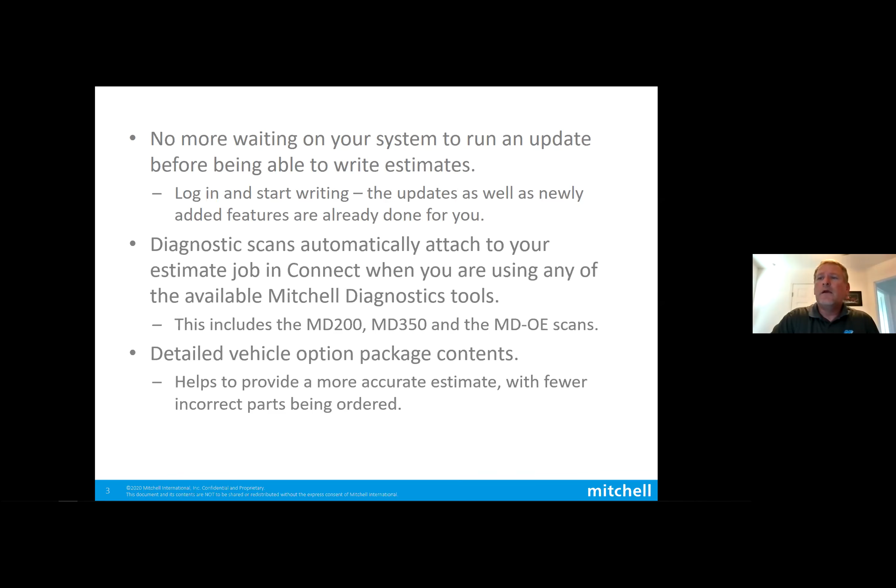There's detailed vehicle option package contents. This helps to provide a more accurate estimate with fewer incorrect parts being ordered.

We also have NADA option selection for a more accurate ACV when you're writing your estimate. This provides a better chance to perform your repairs without prematurely exceeding thresholds.

There's also no having to click on a save button, as every added item automatically recalculates and saves your work. So if you get interrupted, as long as you've added the item, it's there. You can walk away and go do something else, come back, and your work is already saved.

We also have projected estimate scenarios. You can add on certain items, such as suspension components, to see possible complete repair costs. Again, this may help to prevent working on a total loss.

We also have direct links to our procedure pages for that section, so you don't have to search through an index to find out what is included or not included with our labor times.

With the available OEM integrated repair procedures, detailed removal or replacement information is as easy as clicking the line item icon in your estimate, shown here.

We also have guided estimating. Common disassembly components are either included automatically or suggested for selection for a proper and safe repair. And Mitchell uses an outside-in method of estimation, so there is less chance of missing out on repair times if you forget to select every line, as in other systems.

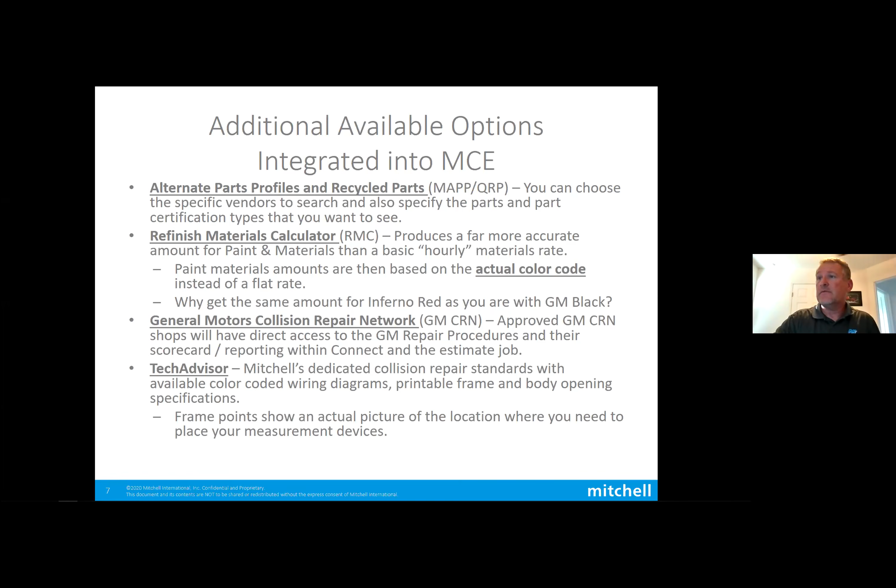For our live demos using Mitchell Cloud Estimating, demo 1 will go over the main features and writing with MCE. My second demo will show you how the Mitchell diagnostics integrate with MCE. And demo 3 will demonstrate using the special Toyota repair templates. Stay tuned at the end for our special offer notice after the demo.

When you're logged into Mitchell Connect, that is where Mitchell Cloud Estimating is. Our menu bar defaults to your open jobs when you're first signed in, and your menu bar here on the left shows some of those items. The TechAdvisor, the option I was just talking about, is located right here.

You can pull up your information and then gather what you're needing for your technician. This is also available to your technician out at his or her workstation. I'm going to paste in a VIN, and here it shows the options available in TechAdvisor for this vehicle.

So for this 2016 Silverado, I'm going to show the vehicle dimensions. It gives which model you have - looking at a crew cab short bed.

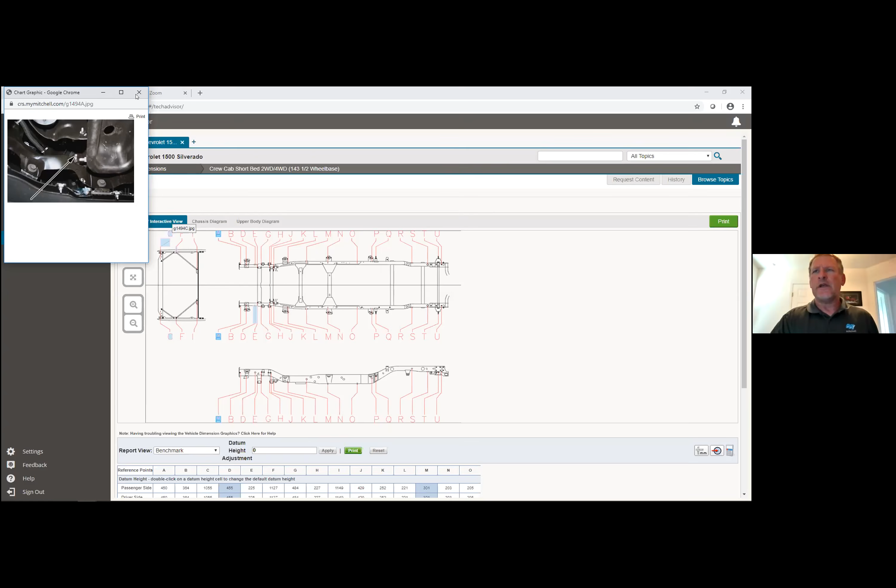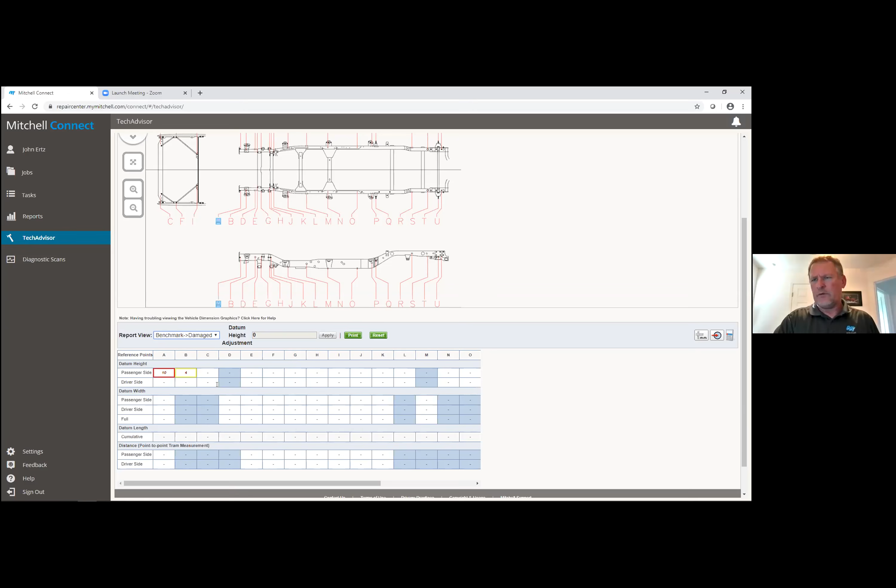Chassis diagrams - again, this is another component of the vehicle dimensions. You can zoom in to get the section that you need, and your technician can use that. They can print these out.

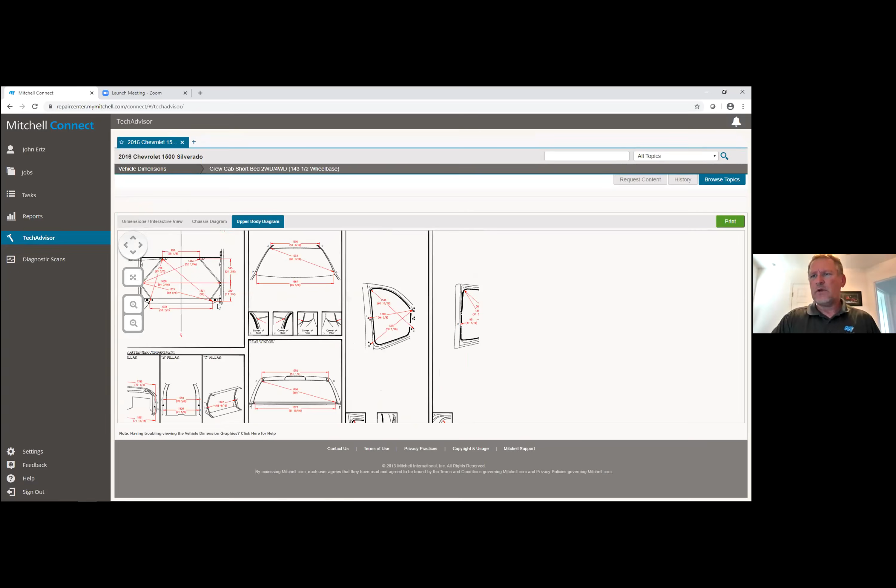Upper body diagrams are going to be your door, window, and other opening specifications. Once again, you can zoom in and print out the section that you need.

Going back to our main topics, you can also access restraint system information. And then we were talking about repair standards - these are similar to the integrated repair procedures. The difference is the technician would have easier access to the repair standards within TechAdvisor. Otherwise, you'd have to give the technician access to the estimating system for the integrated repair procedures. So these are also a little more comprehensive regarding things like interior and exterior trim.

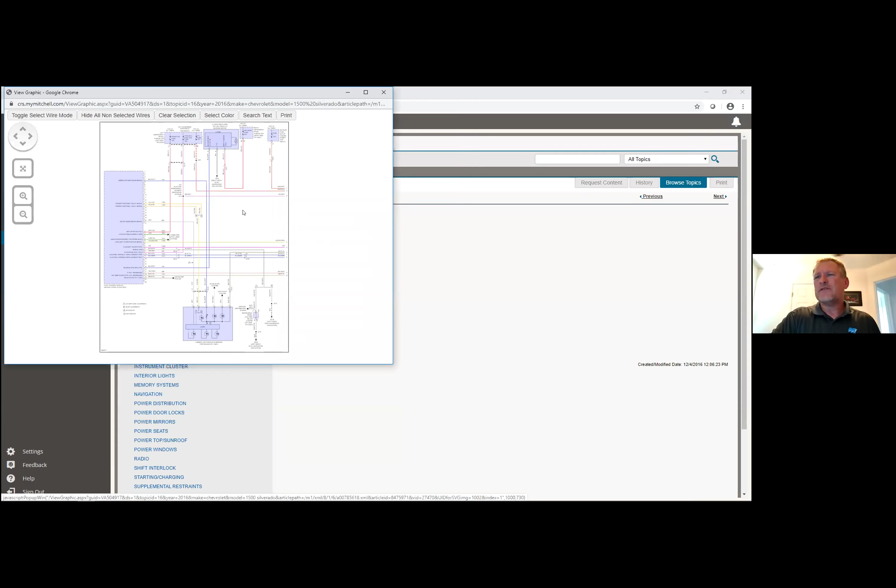Also, wiring diagrams. Selecting our wiring diagrams, common items - you can select that, and as you see, they are color-coded. Let me get this expanded here. So as you're tracing circuits, you can highlight and point out the circuits that you need, and then print this out for the technician as well.

Getting back to our jobs, other assistance with Mitchell Connect and Cloud Estimating is located down here in the Help section. This is our in-product guidance. So if you're brand new to Mitchell Cloud Estimating, you can use this to learn how to create and add users, people for logging in and how they can be managed.

You can learn how to configure your cloud estimating, creating templates and profiles, setting up your alternate parts profiles. Additionally, within the in-product guidance, you have more help available here. These can lead you to a series of tutorials, demos and training videos, so you can watch over and over as necessary when you add new people to your shop as you expand. How to create new jobs, how to use the OE templates, and so on.

And that's all located under the Help area. But now we're going to get on to how to write our demo vehicle. Simply click the plus job in the upper right-hand corner. It starts guiding you through the information that you require to create a job for the customer.

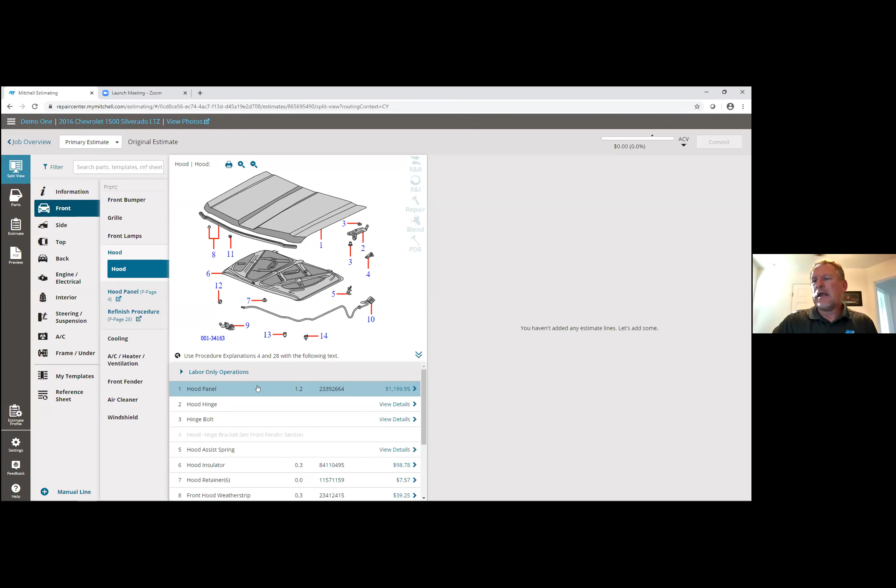So let's start out, we're going to select some parts here. I'm going to go to the front. I'm going to replace a hood. You may either select the number or the line. Once you select it, it activates your quick links. You can remove and replace, remove and install, repair, blend, or PDR.

So in this case, I'm going to remove and replace. For this particular hood, it always defaults to a new part and shows you a repair break even, so you could put up to 25 units of labor when comparing with a new part. If you have subscribed to the alternate parts program and/or the QRP, you will have a compare button.

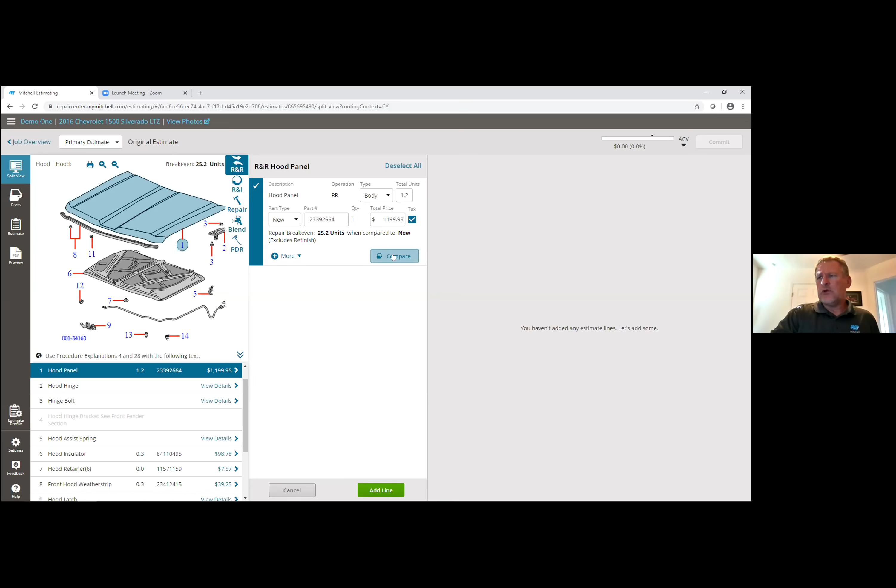Clicking the compare will bring you up the list of the vendors that you've chosen and the certifications that you've chosen to search for. In the case of recycled parts, if the vendor has put any part notes in, you'll see any damage descriptions right down here, along with their contact information. For now, I'm just going to select new parts.

Click done, and I add the line. I'm going to add a fender. So in this case, you can also double click the line to add a part. Choosing here, since I did not filter to left or right side, it brings up the choices that I have. I'm going to select my left fender. Again, if necessary, here's your compare if you subscribe to it.

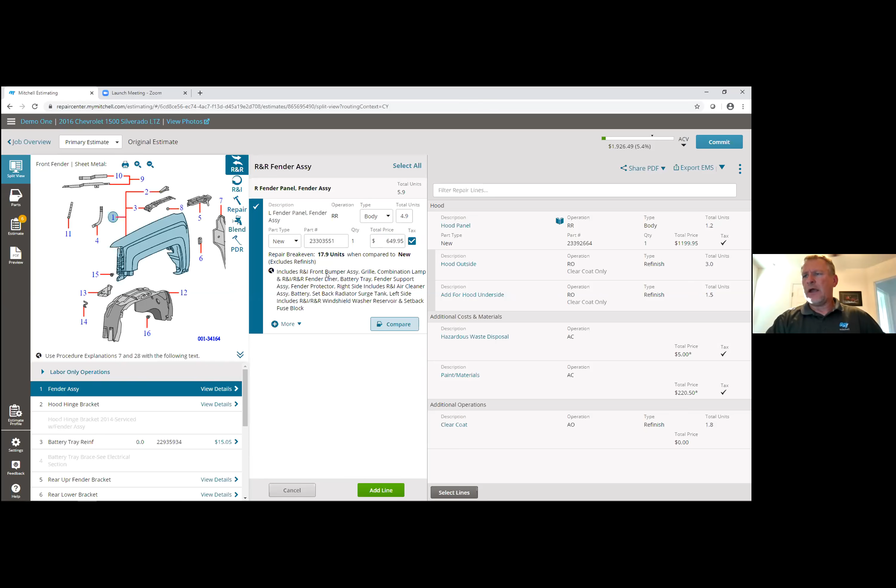One thing I want to point out is in this description, it will give you a description of what is included in this labor time for this fender. So for this particular item, it includes R&I, the front bumper assembly, grille, combination lamp, fender liner, and so on. So I'm going to add that line.

Additional operation information, here is our P-pages. As a result, I'm not searching through an index. That link brings me directly to what is included and what is not included operations.

Hello? Oh, somebody's typing.

So anyways, you can see what are included and not included operations for your estimate, and that gives you some repair documentation. Make sure that you have all of the items that you need to get paid for a proper and safe repair. And that link is directly here within each section, no searching around for it.

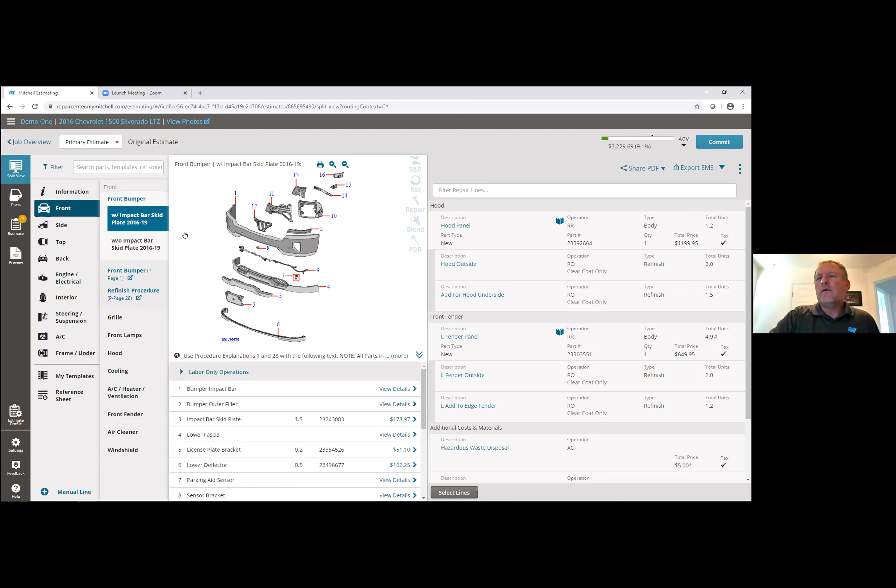So now I'm also going to do some repair. You may also have additional options within that same vehicle, with or without impact bar skid plate. So I'm going to select my without impact bar skid plate, and I'm going to do a repair of that item. It gives me the options, is it chrome or paint to match? I select my paint to match, and then I get to click next.

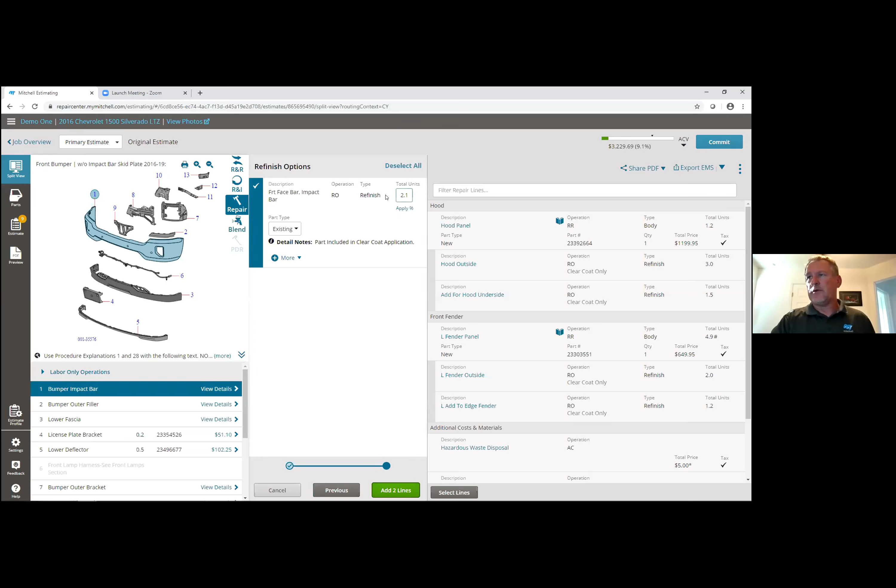This gives me my refinish operations for that repair. If necessary, you can also apply a partial refinish simply by changing the repair time in here. In doing so, that would also put in the wording modified refinish with full clear coat right onto your estimate for you. But I'm just going to add the two lines.

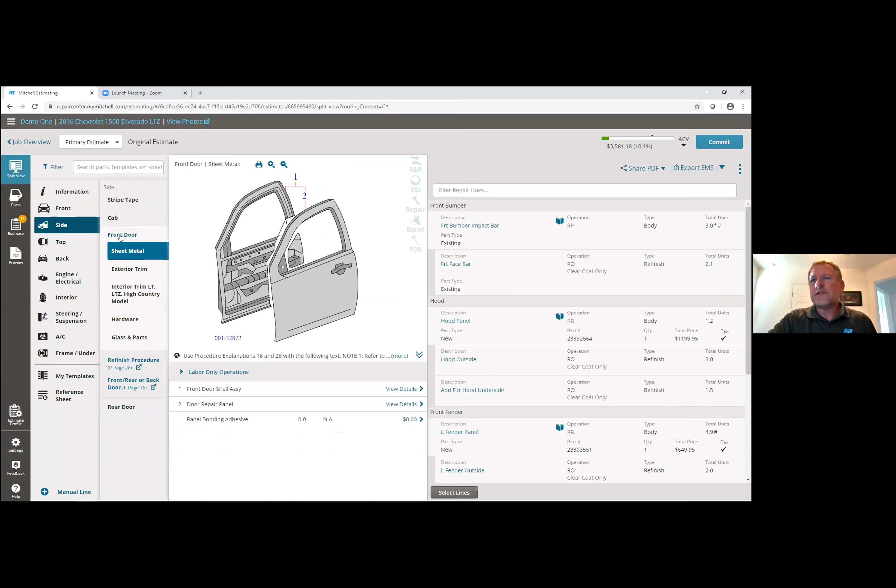Now for a blend operation, let's say we need to blend that front door. I select my panel, I select my blend, and again it asks me which option that I have: left door, right door, and then it breaks it down by regular or crew cab.

I select my next, and here is the guided estimating. It's suggesting, do you need to take these three components off? And it brings it up for you. If you need to select all of them, simply click the select all. If there's one component or any other component that is not actually applicable, just uncheck it. And then we add the lines.

So remembering, adding those lines automatically calculates and saves your estimate for you. We were talking about the integrated repair procedures within the estimate as well. That is indicated by this little book. So on the lines that you have the little book, you can click on it and it brings you right to your integrated repair procedures, and it shows you step by step everything that you need for that item.

Now we were talking about the Refinish materials calculator option as well. So we've put on these operations: repair the bumper, replace the hood and the fender, and blend the door. If you recall, I deliberately did not select the 3-stage in my estimate, the vehicle information card, even though I chose the 800 3-stage Pearl. So our materials rate is currently based off an hourly rate, and that $476 is our total for the paint and materials for these operations.

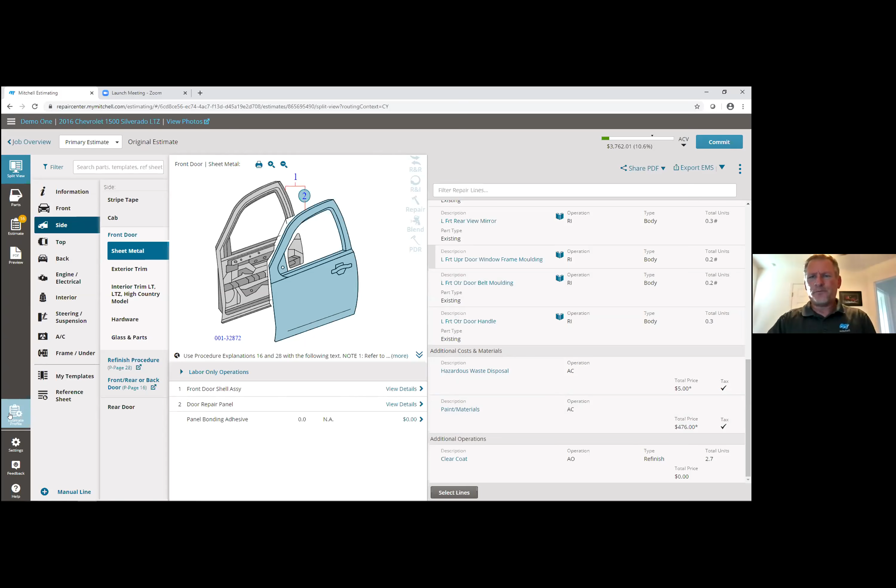So now I want to change over to my Refinish materials calculator. I can go to my estimate profile, calculations, and I edit that, and I changed my paint materials to the RMC Refinish materials calculator, and I select waterborne or solvent, whichever I am painting. Once I apply those changes, it will update my estimate for me automatically.

So we were at $476 originally in our paint and materials, and now it shows that I have one new update on my lines. And just by changing that, it went to $821.41 for the exact same labor operations and paint operations.

Hey John, another quick question, if I could, please.

Sure. Hey, so if you forget to select that at the beginning, like you did on purpose, you can go back and select that at any time and not have to rewrite the sheet. It doesn't wipe the sheet out or do anything. You just select it and it'll make that adjustment for you. That is correct. Perfect, thank you.

And that's exactly the next step that I was going to do, because when you look here, it's calculating still for clear coat, but my Refinish materials are calculating in my RMC report as a 3-stage. So it is bringing down my 3-stage method in the Refinish calculator.

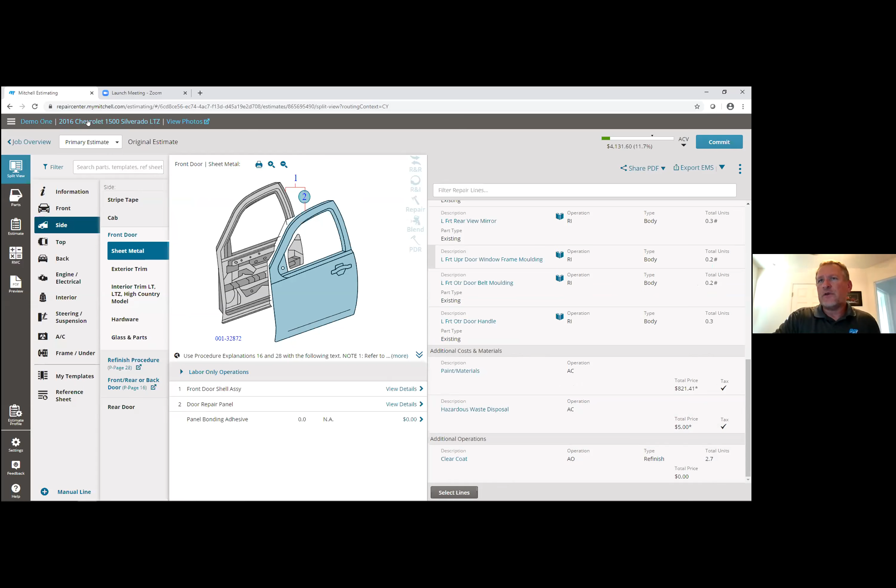The big difference is the time. Because when you do not select that 3-stage wording in your estimate, and I'm going to go back there and do it now, that will not recalculate your labor times to add the additional time required for that 3-stage operation.

Okay, so now I'm going to go back to my estimate. My paint materials now went up just a little bit, but my 3-stage labor time has now recalculated and added the additional labor required for that prepping for 3-stage.

Now I also talked about the Refinish calculator being based on the color code. So this was the 800 white diamond pearl. I'm now going to change over to a 3-stage red. So I'm going to take out my white diamond pearl coat, and I'm going to go to a limited edition red pearl. Same labor operations, exact same labor times that you have in here, but now we're going from a white paint to what was needed for a red pigment vehicle.

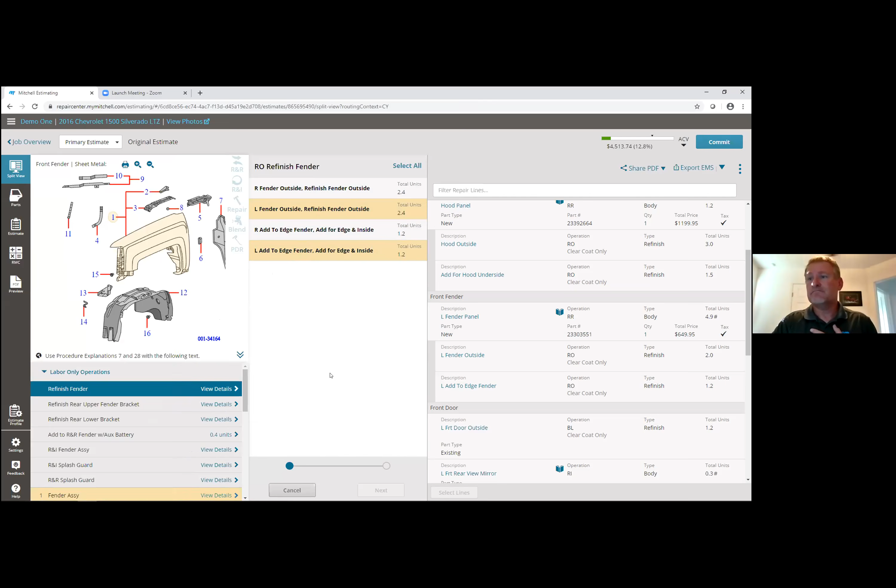Does that answer the question? After I'm unmuted, yes it does. Thank you. Excellent, you're welcome, glad to help.

Okay, so as you go along, again, you can preview your estimate. A reminder, here is your integrated repair procedures. Click on that, and it shows you the OEM repair procedures for that item.

You can also click this OE procedures up here. This gives you a line by line with the booklet here. This one will bunch them together as well, so that you can open up multiples at the same time and print them out that way.

If you wanted to email your estimate to the customer, so if you're standing there with the customer and they say can you email it to me—share PDF, you can email it directly from your computer, tablet, smartphone, iPad, whatever it is. The only thing I would point out is let the customer know that it comes from the address of No Reply Mitchell Cloud Estimating at Mitchell.com. That way, if they have their spam filters set so it blocks things with no reply in it, they're aware of that.

Otherwise, you can simply download it as a PDF and put it in your regular email. Exporting the EMS, you can choose if you're doing an EMS file or a BMS file directly out of the system as well.

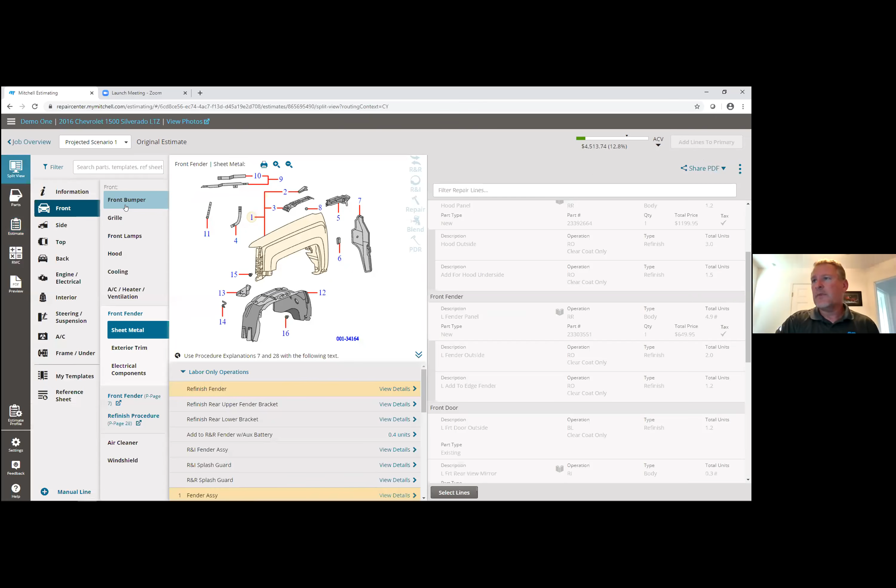We're at 4513.74, but let's say we might have some suspension work on this vehicle. So I'm going to go to my suspension and select a hub and bearing. Once it loads, there we go—left, add line. And as we see, it starts to calculate some additional labor time and parts right in our projected estimate scenario by adding the lines.

This will give you a better idea of where you might be if those components become necessary before you actually get started on a repair.

Once you have the information that you need, if you need to add these to it, you can simply click Add All Lines to Primary, or if you only need a couple of the components, select lines and choose which items you need, and add them to your primary.

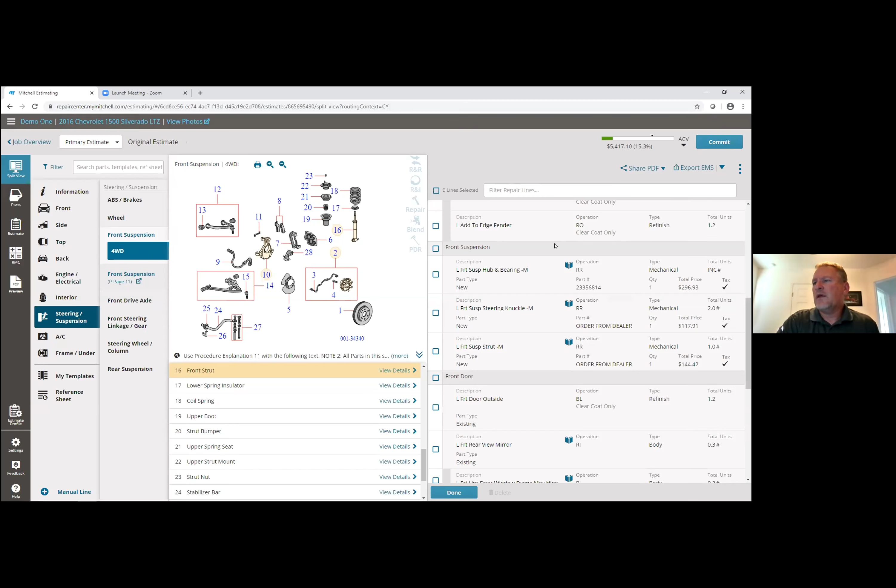And once we return to our primary estimate, they are now added in as well.

Any questions about how the projected estimate scenarios work? Hey John, I'll ask a quick question because I think it's just a fun question to ask, right?

Many times we see total losses come along and people want to keep the original estimate, but only really deal with the tow bill and/or the tear down costs associated with that total loss. So could you use that in a situation where your projected estimate has everything, and then go back and change your primary to just the tow and tear down, so you have a history of what the actual estimate was that you wrote?

With the projected estimate scenario, if you save that in there, it will stay in there. So you have the history of both. Okay, perfect.

All right, so to preview the estimate, how it looks. Where's my mouse? There it is. It went over to my other screen.

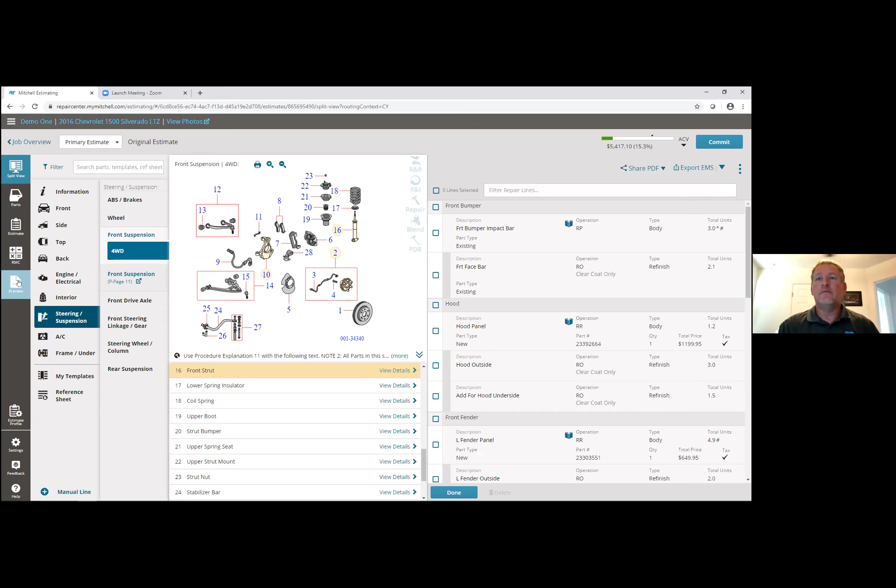Here is a view of our estimate printout. You can add a logo in the upper corner, your shop information, the estimate ID, customer information, appraiser, insurance if applicable, and then the vehicle information. And if there's any parts profiles, such as if we selected aftermarket parts, it will show up where you're getting them from here.

As I stated earlier, we sort front to back. So even if you started your estimate with the rear bumper and worked your way forwards, it's going to sort it from the front to rear anyway. That's the reason why we don't have any differences between our deduction overlaps, so you don't have to select a specific panel to get a lower amount of overlap on the next one.

We also have three views that you can choose depending on what you prefer. The view you're looking at now includes what we call the CEG values. CEG stands for Collision Estimating Guide, and you can see where you may have overlap times. You can select and program your system to show a standard view, which eliminates the CEG column. And if your municipality requires labor dollars to be shown on the estimate, we also have that option as well.